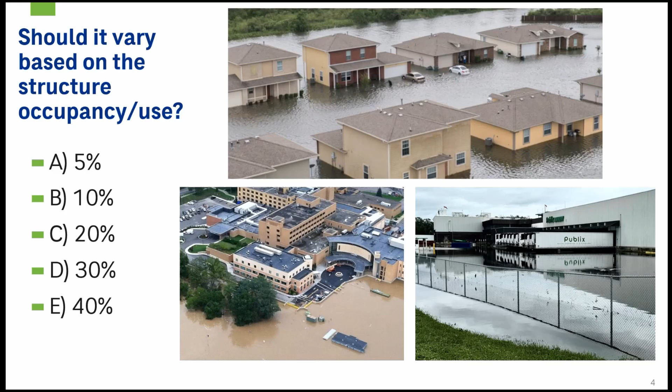We also poll the audience to gauge whether that requirement, or their risk tolerance, should be the same for all types of construction. Do you have the same opinion about a house versus, let's say, a supermarket or a warehouse, or for that matter, a hospital or other critical facility? For the most part, people answer yes, that they think there should be a different standard for something like a hospital versus maybe a single family house.

So those are two kinds of questions we talk through for a bit as a group, and then we wrap up with these being the recurrence intervals associated with those percent probabilities over a 50-year period. I mentioned earlier about me selecting option E, and I select that for the sake of discussion because that reflects what our current requirements are.

The 100-year annual chance, or what we currently use as the base flood, has a 40% probability of occurring over a 50-year period. For option D, as a rule of thumb, the National Fire Protection Association estimates there's about a 22 to 30% probability, with 30% being the higher end range, of having a house fire that requires a fire department to respond to your house over a 50-year period.

Option C, I typically refer to this as rolling the dice. Mother Nature has about a 1 in 6 chance, or about 16 to 17%, almost 20% chance of rolling a specific number. Option B, which is that 10% chance over that 50-year period, is about the equivalent of the risk for a magnitude 9 or greater earthquake or seismic event out in the Cascadia subduction zone, think Northern California to Vancouver.

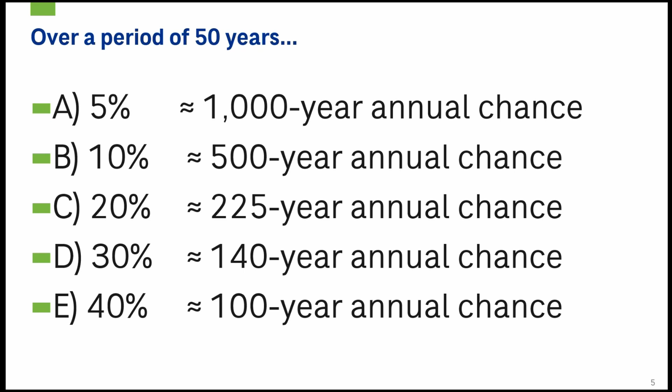This 5% chance, option A, is kind of like, if you ever played roulette, betting on two numbers. When you split your chip across two numbers, you have about a 5% chance of that number being hit. You'll see options A and B later in this presentation as ASCE 24, as Seal just mentioned, sets the 500-year and the 1,000-year as two of the different recurrence intervals it uses for the minimum elevation requirements based on the criticality of the building.

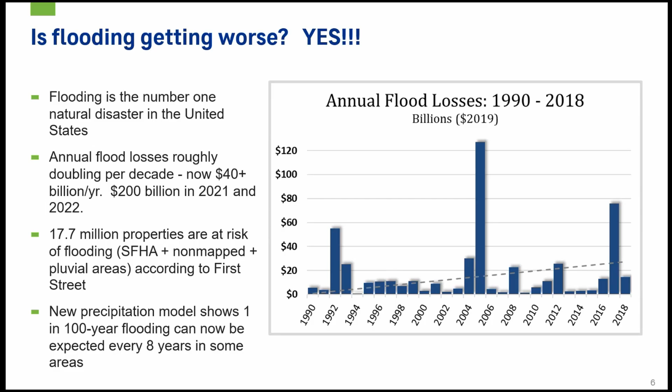These are some statistics the Association of State Floodplain Managers put together. The flood losses continue to increase. You can see here, Hurricane Katrina is clearly a blip in this chart. Harvey, Irma, and Maria in 2017 are also events that jump out at you. There's also some other major flooding events along the Mississippi, which you can see in the early 90s, and other events sprinkled throughout. But the bottom line on this slide is that flooding damages and trends seem to be getting worse.

I recently looked at the NFIP, or National Flood Insurance Program, claims from FEMA's open data. While flood insurance is mandatory within the floodplain, or special flood hazard area, and makes up most of the policies, about 25% of those claims actually come from outside the special flood hazard area, with the average claim being about the same both in and outside of it.

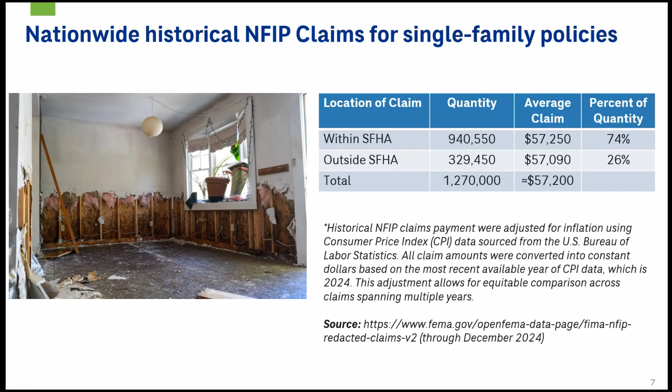One thing you'll notice, though, if you focus on newer construction, post-2000, is that the percentage of claims is slightly higher. So now it's about 30-70 versus 25-75, meaning 30% of those claims are occurring outside the special flood hazard area. And our claims are actually about 10% higher, almost $100,000 average, outside the special flood hazard area.

There's a lot of contributing factors to this. One question that always comes up is, why are they going up? In general, our houses are larger after 2000 than they were prior to 2000. So you have a larger house to be damaged, and we see higher claims in newer construction when they are impacted.

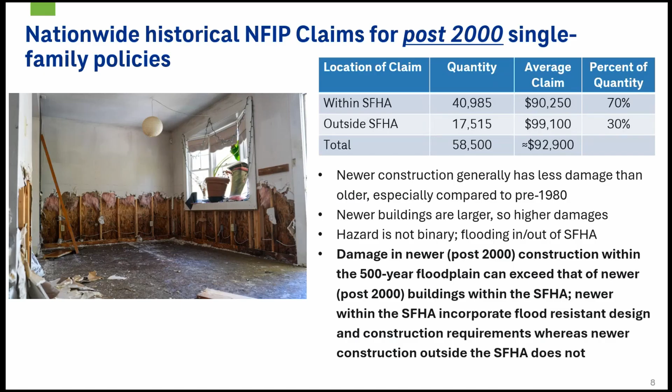But one reason, in my opinion, why you see claims outside the special flood hazard area having higher amounts is that newer construction within the floodplain is required to meet flood-resistant design and construction requirements under the CFR and NFIP regulations, whereas newer construction outside the special flood hazard area does not. So this binary approach is relatively ineffective, especially for this newer construction.

So enough on statistics, let's get into the topic of ASCE 24. It's a consensus standard that establishes the minimum requirements for flood-resistant design and construction of structures in the floodplain. Note the title indicates 'resistant' - it's not flood-proof, so there's still potential for damage and some level of residual risk. The other key thing to note is that the scope of the standard is for structures within flood hazard areas, so that flood hazard area has to be delineated for this standard to be applied or enforced.

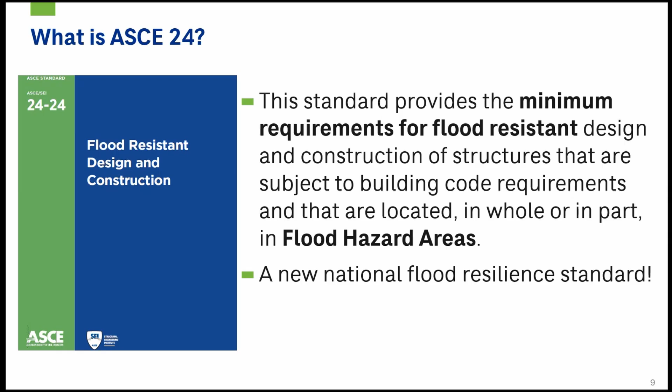A quick history on 24: the standard itself goes back to the mid-90s. I think it may have stemmed from some of those claims I showed you on those charts in the Midwest - we had damages up and down the Mississippi River. So in the mid-90s, funded by FEMA, the American Society of Civil Engineers produced a pre-standard document on flood-resistant design and construction.

The second edition was published in 2005, and the third edition, or the previous edition, is the one we have right now - published in 2014. So when you hear about 24-98, 24-05, 24-14, or now 24-24, that second number just has to do with the year in which it was published.

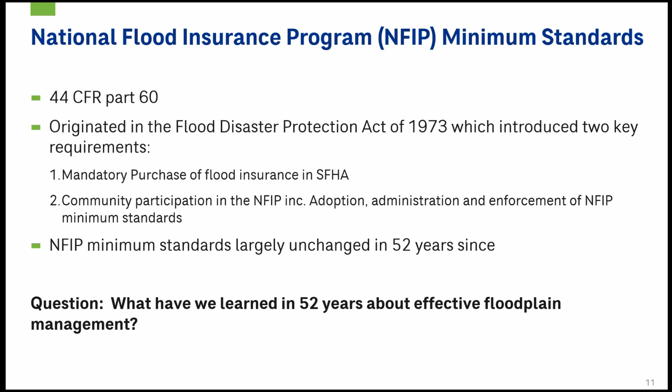As I mentioned earlier, most of that standard development, incorporating these into the building code, started in the mid-90s. So these requirements existed for about 20 years before formal, consistent adoption in the building code, predominantly relying on floodplain management ordinances at the state and local level to implement and enforce these requirements. Now, since the mid-90s to early 2000s, it's been supplemented by the building department having to make sure these are properly adopted and enforced as well.

The standard itself provides the minimum requirements for flood-resistant design and construction of structures required to meet building code requirements or subject to floodplain management regulations. Sometimes ASCE 24 isn't adopted at the state and local level by a building code; instead, it's adopted by a local floodplain management ordinance. The overall intent is to convey the NFIP requirements, so by following ASCE 24, you should be meeting or exceeding the requirements of the NFIP.

These requirements, similar to the triggers that exist under the National Flood Insurance Program, apply when within the flood hazard area, and they apply to new construction, or potentially something that's being substantially improved or that suffered substantial damage.

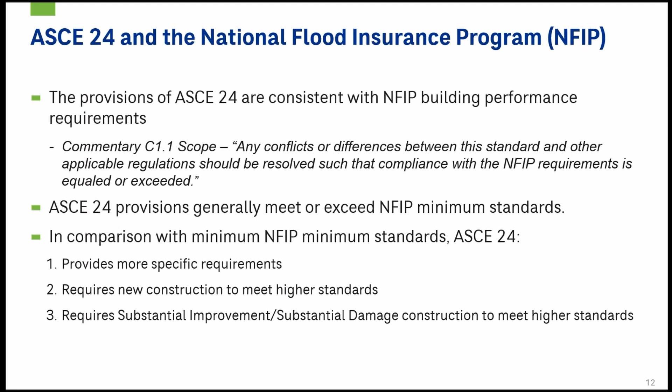Hopefully that gave you a good background on the standard for those of you that weren't familiar with it, and tried to draw some parallels between it and what's in the National Flood Insurance Program or what's in Part 60 of the Code of Federal Regulations.

Now I'm going to focus on some key changes that occurred or that are being introduced in the latest edition of the standard. Again, this is the 2024 edition compared to the 2014 edition.

The first piece is that we now have a risk-based approach to elevation. What does this mean? Traditionally, most floodplain management ordinances and even ASCE 24-14 handled something like freeboard by simply adding 1, 2, or 3 feet of elevation to the base flood elevation based on the criticality and potentially the location of the building.

For example, in ASCE 24-14, you may have more freeboard in a coastal V zone than you would throughout the rest of the floodplain, or you may have additional freeboard for a school versus a house. Keep in mind, not every floodplain is the same, so adding 1 or 2 feet does not necessarily provide you the same level of protection.

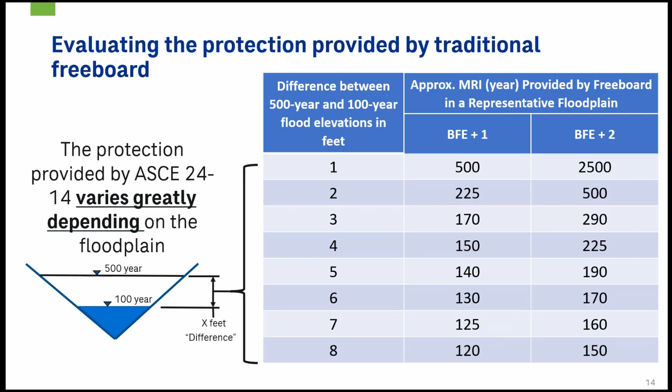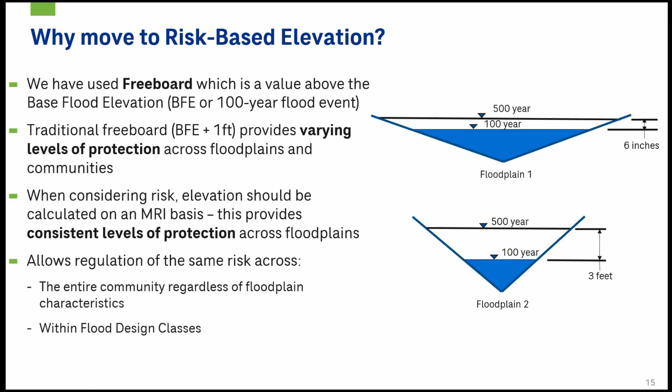That's one of the points of emphasis that the ASCE 24 committee had in moving to this approach. For example, with 1 foot of freeboard in a floodplain where there's only 1 foot of difference between the 100-year and 500-year levels, you're meeting that 500-year level of protection. The larger that difference becomes, the less flood risk reduction that 1 foot of freeboard actually provides. So we moved to a risk-based approach to elevation, and 24 moves to using a recurrence interval-based elevation, which allows for providing a consistent level of protection across all floodplains.

Keep in mind, this is based on the flood design class of the building. By flood design class, I mean what percent probability would you find acceptable or tolerate within your community for new construction over the next 50 years, and whether you'd have that same level of risk tolerance based on the criticality of that building. Most houses, single family construction, duplexes, and similar buildings will fall into this flood design class or risk category 2 building.

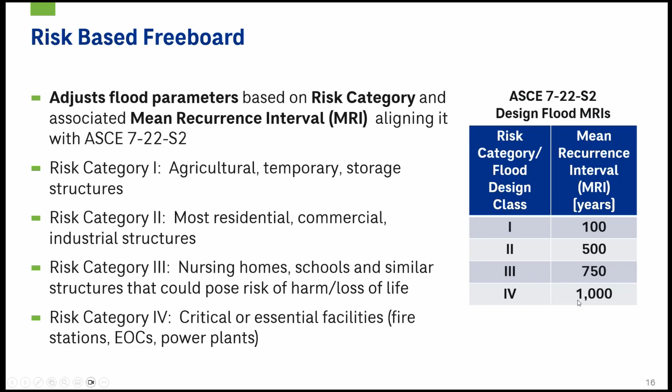So under ASCE 24, you're going to follow the 500-year mean recurrence interval as the basis for your design flood elevation. If you're building something like a nursing home or a school, that'll be a risk category or flood design class 3, required to be elevated to the 750-year level. And if you're building a critical or essential facility, such as an emergency operations center or a hospital, those will have to be designed to the 1,000-year recurrence interval.

Hopefully that gives you an overview of the elevations, the MRI-based or flood risk-based elevation requirements. To illustrate this further, I have a few slides showing how not every floodplain is the same. These are 3 different floodplains, pretty sure all in Ohio.

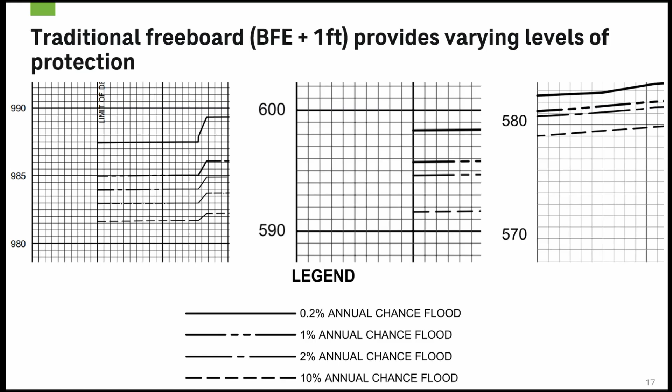We use this presentation for a lot of recent deliveries, and these are examples in Ohio. From left to right, you have about a 3-foot difference between the 100 and 500-year flood elevation, a 2-foot difference, and a 1-foot difference, across different watersheds and rivers throughout Ohio. The point is that 1-foot of freeboard doesn't always provide the same level of risk reduction. So we're going to the 500-year instead, at least for homes and risk category 2 buildings, which is the most common type of construction. And we're going even further for more critical facilities.

This slide is an example in the vicinity of Minneapolis, showing the profile along the Mississippi River. If we zoom in, you can see that even within this short distance along the river, you can have a difference of anywhere from 1 to 3 feet. The predominant difference in this area is about 2 to 3 feet. Again, this illustrates the difference between the 100 and 500 year, and makes sure anything new we're building is protected to at least the 500-year flood elevation.

Another key difference or attribute in 24-24 is the floodplain extent. I realize there's a lot of text on this slide, but these definitions are pulled directly from the standard, so I'm just highlighting 2 key points. The 2024 edition of ASCE 24 expands the flood hazard area to the 500-year floodplain, so the definition of the design flood in ASCE 24 was adjusted accordingly.

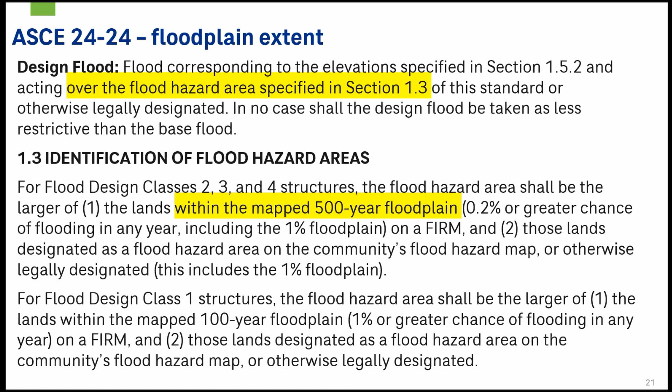Before, it used to just be the special flood hazard area or the base flood; now we're expanding to the 500 year, pointing to the definition in section 1.3. That definition specifically states it's within the mapped 500-year floodplain. Not every flood insurance rate map in the country has a shaded X zone or this 500-year floodplain delineated, so the committee wanted to make sure it had to be mapped—either on a flood insurance rate map, or a product like what Minnesota's DNR provides showing the 500-year flood hazard area, or whatever's adopted by the community. The key point is that it was mapped, and it's not on the developer or design professional to figure out whether an area is or isn't within a 500-year floodplain. So it has to be mapped in order to apply, if you're adopting the standard as written.

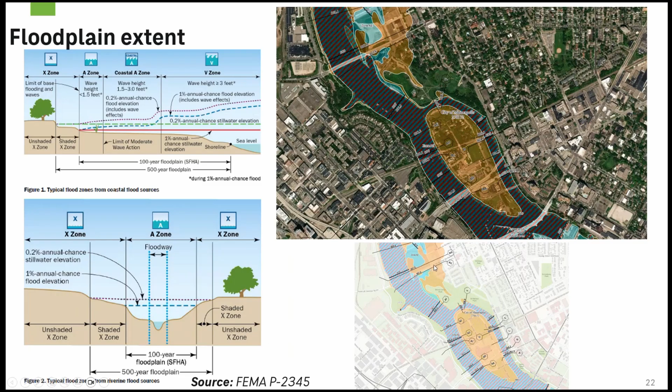So when following 24-24 and using a FIRM, if you're in the shaded X zone—like that island I showed earlier in Minneapolis—it would apply there. If I move further northwest of that island, traditionally our floodplain management ordinances, the Code of Federal Regulations, and the NFIP regulate construction within the A zone and the floodway. Now it would be expanded to the shaded X zone if applying ASCE 24. This was a map view; now here's a profile view. There aren't too many coastal or V zone floodplains, so I'll focus on this non-coastal example: you'll typically have your A zone with the floodway delineated within it, shown here on the map, and also a shaded X zone. So this standard is now expanding the flood hazard area to include the shaded X zone, or the 500-year floodplain.

So moving to a risk-based elevation, in my opinion, further exacerbates what we call the waterfall effect of the current NFIP. This is the binary approach—you're either in or out of the floodplain. This is the limit of the 100-year floodplain: you're in it, or you're out of it. We regulate you here, we don't regulate you out here.

But now with these additional elevation requirements, whether you're using freeboard, which is what we've used traditionally, or if you assume the difference between the BFE and the 500-year is 1, 2, or 3 feet, we have buildings built within the 100-year floodplain that are much higher, potentially much higher, than those built immediately outside of it. So we call this the waterfall effect, and this was also illustrated through those flood insurance claims I was showing you earlier.

In new construction, we're seeing that the claims out here are about 10% higher than in here for newer construction. And that's because these buildings being built here are being elevated, where buildings here aren't. So we're seeing higher damages out here in this 500-year floodplain.

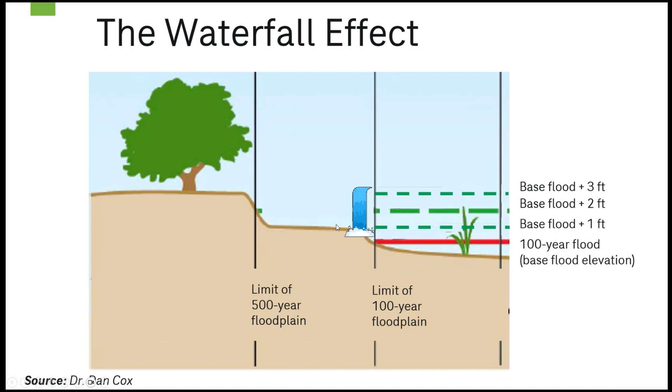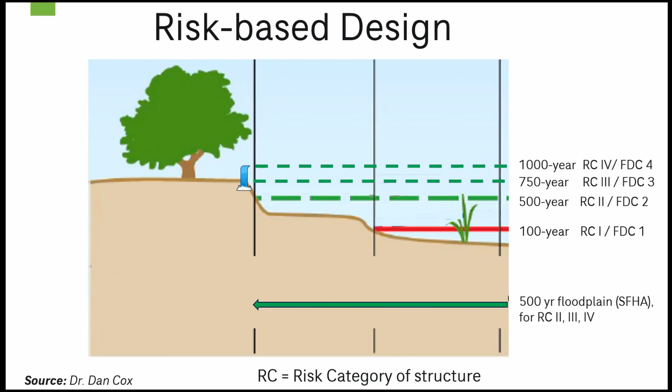So the goal behind this is, in essence, to expand the extent of the 500-year floodplain. The binary effect will still exist, but it should not be as hazardous by extending this out to the 500-year floodplain. Hopefully that gives you a basic overview of the risk-based approach, both from an elevation standpoint and from a flood extent or flood hazard map extent standpoint.

I'm now going to walk through a recent case study from Hurricane Helene in Tennessee to help illustrate this elevation and floodplain extent example.

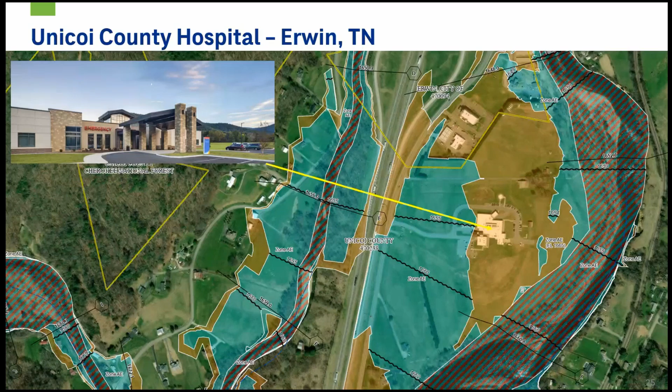This is a hospital built in Erwin, Tennessee, in Unicoi County. This hospital was opened in 2018, and based on news reports, it's about a $30 million facility, about 40,000 square feet. Unfortunately, during Hurricane Helene, this hospital experienced significant flooding, and over 50 people had to be rescued from the roof at this facility.

So we saw this example and were curious about it, and looked at how different things would have been had ASCE 24-24 been in place and incorporated here. This is an example of a floodplain that the decisions and changes being made in 24-24 are geared towards.

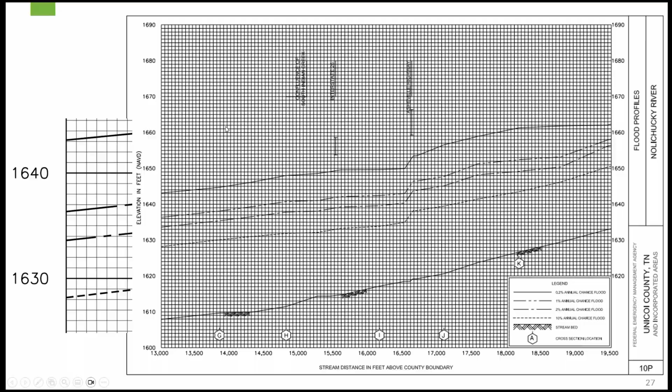This row here, Flood Design Class 2, refers to houses—residential buildings, things of that nature, probably your most common type of construction. 750 represents an additional level of criticality, like Flood Design Class 3, or buildings built to the 750-year recurrence interval—these are things like schools. And finally, Flood Design Class 4 covers your most critical facilities, such as hospitals, like the scenario we have here.

If that information is available—if you have the 500-year flood elevation—then you just apply Method A. If I have a house I'm building and I know the 500-year flood elevation, that's all I have to build to. We also know, and a lot of people on the committee realize, that most flood insurance studies across the country may or may not have this information, so there are other methods to help you estimate that elevation based on the information available to you.

So let's say I'm building a house and I don't have the 500-year, but I do have the 100-year and the 10-year based on the flood insurance study—then I can estimate it off of that. Same thing: most parts of the country don't have a 750-year or 1,000-year figure, so there are ways to estimate what that would be based on having the 500 and the 100, or the 100 and the 10-year. And even if you don't have any of that information, all you have is the 100-year, then you go back to a freeboard approach of 2.1, 2.6, and 3 feet, depending on the criticality of the building.

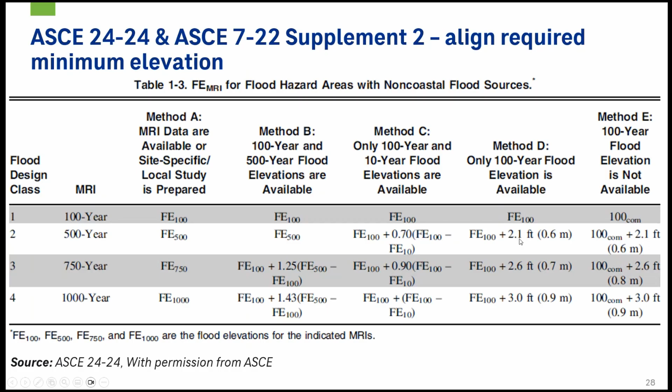The way these freeboard values were estimated was through an analysis done of the entire country, ultimately looking at the average of the 50th percentile of a population-weighted data set. They took building inventories across the country and characteristics of those floodplains, and came up with freeboard approaches for the different flood design classes of buildings. That's how you establish your elevations according to the new standard.

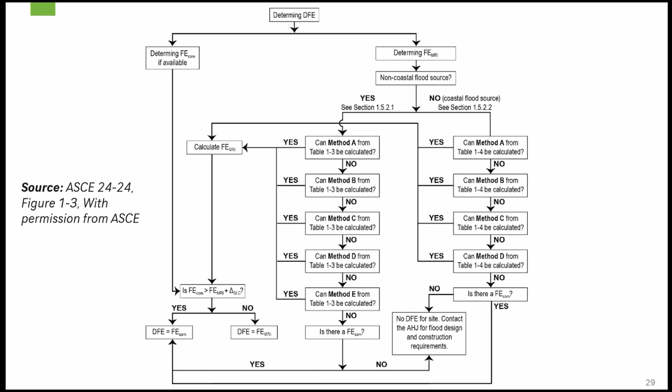There's also a flow chart in the document to reinforce the point that you don't have to go through every method on that previous table. If you have the information in front of you, if you have method A, if you have the 500, 750, or 1,000 established either on the floodplain map, or a community has done the study and established that for their entire community, then there's no reason to keep going through methods B, C, D, and E. All these different steps are trying to work with the best available information. If you have it, work with that. If you don't have sufficient information, then here's other ways to best estimate it.

We understand, or the committee understood, that there's probably a lot to handle on that chart, a lot of calculations that potentially have to be made. So the LSU Ag Center, Dr. Carol Friedland, I'm not sure if any of you are familiar with her, but she was on the committee. Her and some of the students there created this web-based tool that just allows you to enter in the information, and it tells you what your design flood elevation is.

So if you tell it what kind of building you're constructing, what kind of floodplain you're in, and what the base flood is, it'll estimate the design flood elevation for you. Based on this form here, the screenshot, we had a BFE of 7, and it's estimating that the minimum required elevation based on ASCE 24 is 9.1 feet. Again, this is likely because there was limited information available, data was not available, so it just applied our freeboard method.

But in this case here, I'm going to go back to the hospital, walk you through the tool a little bit further, and show you how you could use other information besides that freeboard method to estimate what the design flood elevation is. I'm assuming most of you are familiar with flood insurance studies, at least reading a profile, but what would the DFE be for the hospital under ASCE 24?

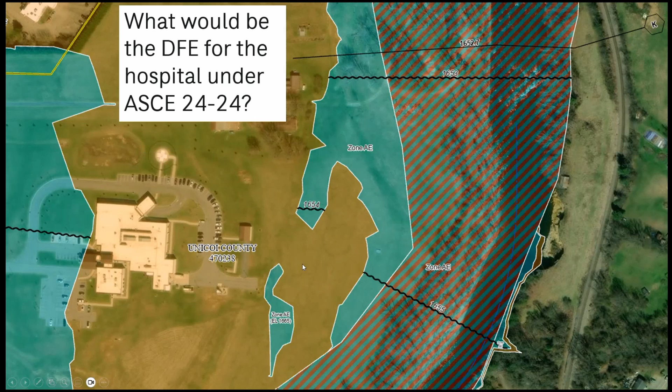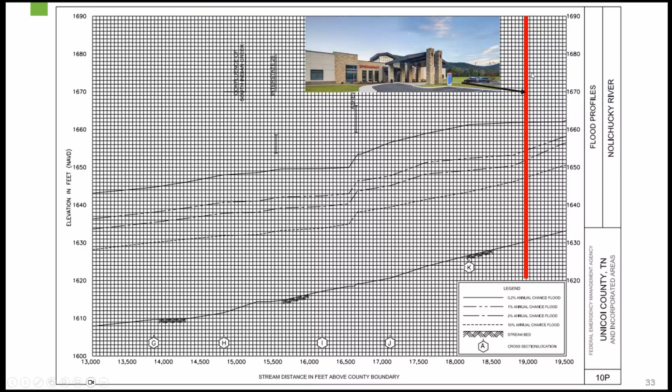Notice this is cross-section K right here, and the hospital is just a couple hundred feet upstream of cross-section K, and the BFE here is about 1655. So I'm going to go into that profile that I had up earlier on the screen. I showed you there was a 6-foot difference between the 100 and the 500 here, and I'm going to look specifically at the location of the hospital. Here's cross-section K, and I said I'm a couple hundred feet upstream of that. So here's a red line marking where the hospital is located.

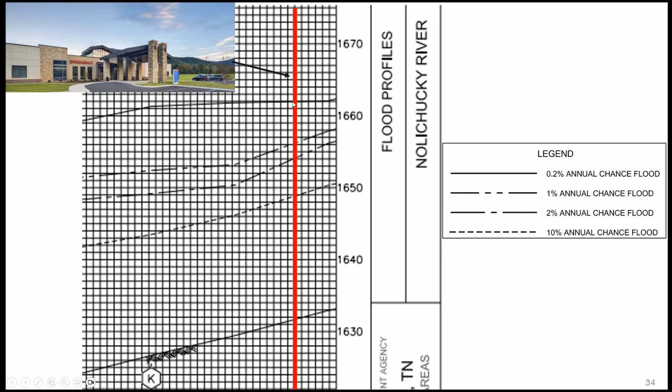I zoom in a little bit further on there. As you can see here, I have the 10, the 50, the 100, and the 500-year elevation available to me across the location of that hospital. If I read those elevations, here's that 1655 I mentioned earlier, which matches the BFE, and that's consistent with the 100-year. See that reading right there of 1655. I'm estimating the 500-year is about 1662, and that the 10-year is about 1648.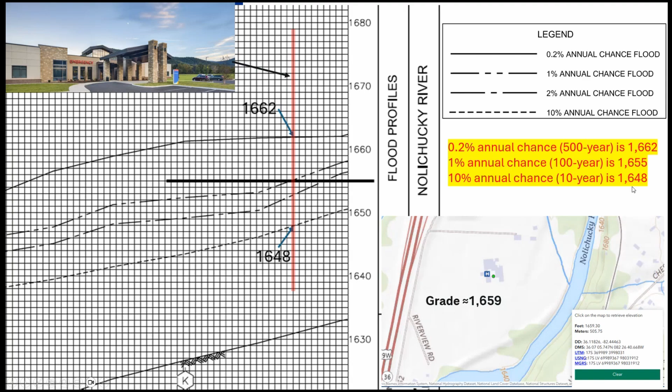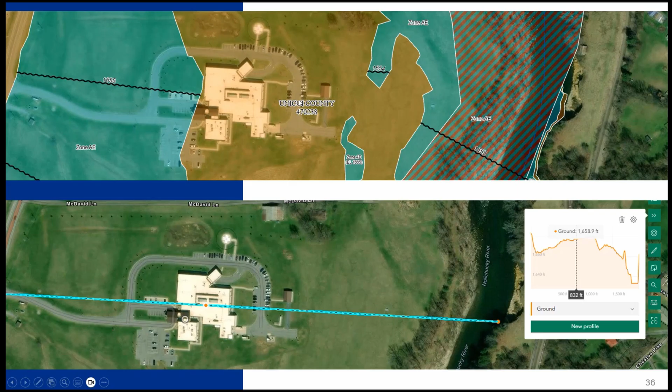Now I have most of the information that I need. Again, here's a profile view of that hospital. Here's the firm, the flood insurance rate map, and the USGS topo profile here at the bottom. Currently speaking, this hospital, if you follow most floodplain management ordinances or the CFR, is outside the floodplain, so it wouldn't be regulated. But under ASCE 24, because we've expanded the flood hazard area and the 500-year is delineated, this would fall under the requirements of ASCE 24. So it does apply to this.

Let's say we were building it new. Now what would our design flood elevation be? It's a risk category 4, it's in a riverine floodplain. We're telling the tool it's in a shaded X zone. We had read the BFE of 1655, both off the firm and off of the flood insurance study profile. And then we have an elevation, a 500-year flood elevation off of the profile, of 1662. So my design flood elevation for a risk category 4 building here, based on using this tool, and again I didn't have to do any of the math that was in that chart, would be 1665.

Again, this is an estimate based off of using the 500 and 100-year elevations. So 1665, and I told you earlier the elevation of that grade here was about 1659. So this building would have been built about 6 feet higher than it was at the time it was built in 2018, because there was no design flood elevation requirements when this was built, since it was outside the special flood hazard area.

Let's say the community wanted to build a school just west of the hospital. Under current requirements, we're now in the floodplain, so it would at least have to be built to the BFE of 1655. But let's see what would happen under ASCE 24. Very similar, but the main difference is I'm telling it it's a risk category 3 building, so now it's going to estimate what the 750-year elevation would be. Same inputs: 1655 for my BFE, 1662 for my 500, and my design flood elevation for a risk category 3 building would be 1663.8.

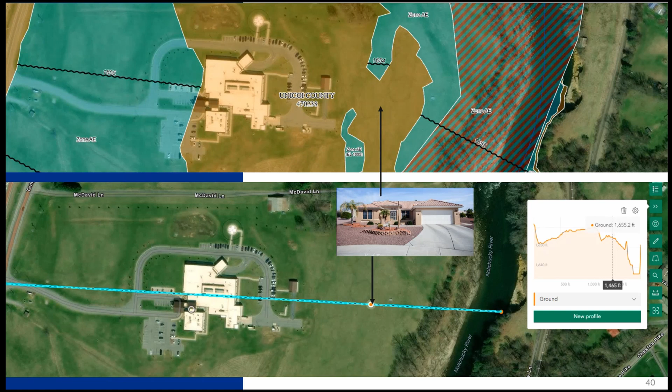And then finally, if the community wanted to build a house or a subdivision, a risk category 2 building, let's say to the east of the hospital, this is outside the special flood hazard area. Currently, most communities wouldn't regulate this construction, but under ASCE 24, if they adopted it, they would be required to figure out what the 500-year flood elevation is. In this case I wouldn't need the web tool; I know it's 1662, so no inputs to make, and that would establish the design flood elevation for a risk category 2 building.

Manny, I've got a question.

Sure. Seal and I have looked at ASCE 24 and looking at the different classes, and I know it's descriptive with examples of what each class type of structure would be. But I've also found there are some cases where I'm never quite sure, is it a 3 or is it a 4? Is it strictly just a best judgment call in those cases, I assume?

I think so. One of the gray areas for me is things like water treatment plants and utilities. It talks about if they service a hospital, that brings them up to a 4, but for the most part I think most critical and essential facilities fit into that 4 area. Things like schools, maybe most utilities and treatment plants fall into that 3. Your residential and a lot of commercial spaces like stores, as long as they don't have a high occupancy number, likely fit into risk category 2. We were looking at a municipal well and debating, is it a 3 or 4? We decided on a 3, but it sounds like if it's strictly serving something like a hospital, maybe it could be a 4.

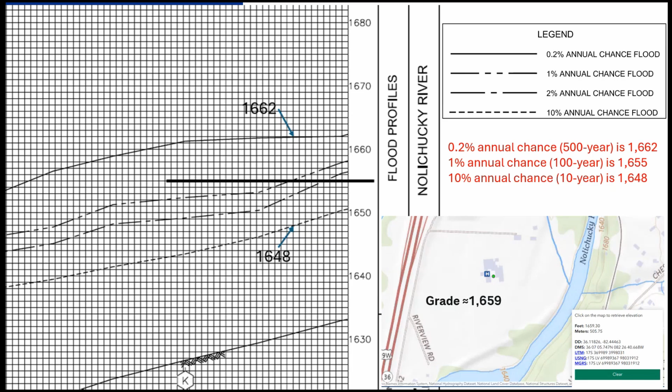Thank you. All right, I'm going to hop into the last topic now, with respect to the key changes in ASCE 24. Did you say ASCE 24 was already adopted by the International Building Code?

It has not. The International Code Council is in the process of updating to the 2027 edition of their code, so the IBC and IRC—I have a slide on it too at the end. They have not finished that process. There was one hearing in Orlando here in April, and there's another hearing coming up later this month.

That hearing in Cleveland will decide whether or not ASCE 24 is adopted into both the International Building Code and the International Residential Code for the 2027 edition. The 2024 edition of the IBC and IRC, or the I-codes, have adopted ASCE 24-14. I believe ASCE 24-14 has been in the I-codes since the 2018 edition—so 18, 21, and 24.

Before that, ASCE 24-05 was in the 2015, 2012, 2009, and 2006 editions of the building code. So I think since about the 2003 edition of the building codes, ASCE 24 has been incorporated—it's just a matter of which edition, 24-05 or 24-14, that's been adopted. Right now, 24-24 is to be determined.

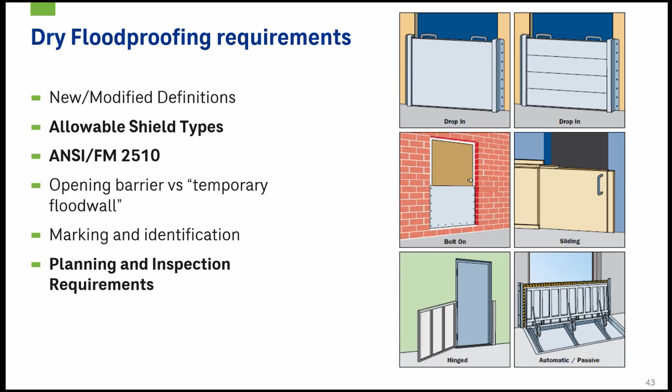With respect to shield types, think of these shields as measures needed to help finish closing off the building. In essence, dry flood proofing means keeping water from coming into the building, so you make the walls substantially impermeable. The walls keep the water out, but you still have to be able to get in and out of the building.

Normally that's typically a door. Sometimes folks construct stairwells that go up and down, but for the most part, most architects and engineers keep that door at the same level. The walls keep the water out, but they have to put a temporary opening barrier up to keep water from coming in through that door. These are called shields, defined as such in the standard, and there are new requirements for shields in Chapter 6 of ASCE 24-24.

Two things in particular: first, there are different requirements for new construction versus substantial improvement—two different sets of categories. This is relatively new to the standard; there was very little in ASCE 24-14 that differentiated between new and substantial improvement. New is something built for the first time, at least for this slide, while substantial improvement is more like a retrofit. So the committee outlined different requirements for something built for the first time versus something retrofitted.

The other difference you'll see with these shield requirements is whether they're contingent or permanent. Contingent means the logs are removable and stored somewhere. Permanent means that shield has to be there 24/7. So the more critical the building—you'll see here, risk category 4—the more permanent that measure needs to be. If you have a hospital with an exterior door you needed to protect, those measures would need to be permanent.

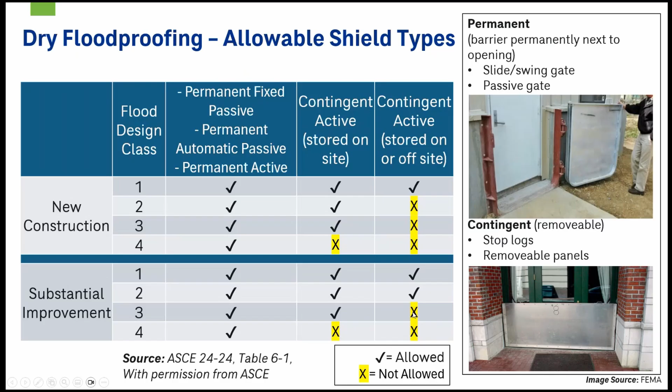To further allow for different levels of risk, there's also the question of whether contingent measures have to be stored on site or not. For new construction, the expectation is that those measures be stored on site. For retrofits, there is more leeway in terms of when measures can be stored on or off site. Another piece related to dry flood proofing is the testing requirements for these shields—in new construction, all shields must be tested.

So your design needs to incorporate those tested shields. Let's say there's a product out there that was tested to an opening that's 10 feet wide and 4 feet in height, keeping out 4 feet of water. For new construction, that's the limitation of the opening size. It can't be wider than 10 feet, and it cannot exceed more than 4 feet of water that it needs to keep out. You're limited to using products that have been tested to the standard.

For retrofits, there is leeway that allows a design professional to go beyond what was tested. The thought process was that for a lot of retrofits, you have a lot less control over the size of the opening. So potentially the design professional, architects, or engineers can work with the manufacturer to confirm whether the product will meet requirements. Let's say you have a 12-foot opening and need to keep 6 feet of water out, but that product was only tested to 10 by 4. Maybe they can evaluate with the manufacturer, or potentially do limited testing rather than the full testing required to meet 2510, to confirm that product can meet those requirements.

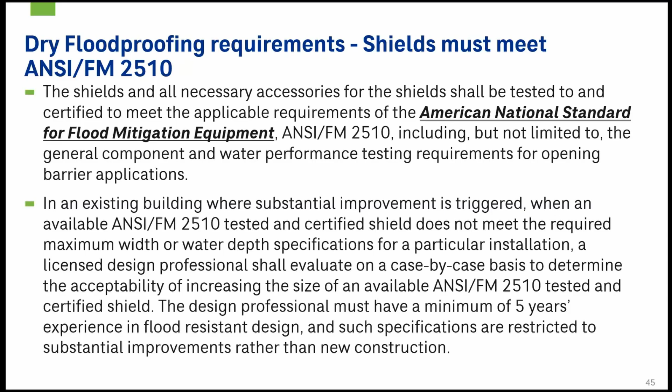So again, the same difference as the previous slide - you do have some allowance for differences between something built new for the first time versus something being retrofitted. And then finally, for planning and inspection requirements, there are changes related to plans at the time of construction.

They should outline routine inspections and deployment requirements within those plans. The plans need to meet certain implementation requirements, specifically timing - how much time it takes to implement these measures. So the more critical the building, the less time you have.

So let's say I'll use that hospital example. If you're dry flood proofing it, all those measures should be able to be implemented within 4 hours. Maybe for a flood design class 2, let's say a storefront building, those have 12 hours. A school would potentially have 8 hours as a flood design class 3.

And then a couple slides back, I showed you the emphasis on having permanent measures. The committee felt there was a possibility we're going to see a lot more use of passive measures. Passive measures, in essence, don't require any level of human intervention. One lesson learned with those products is that they've actually been deployed and the building owners didn't even realize it - say there was some rain or storm water, and that passive gate automatically popped up.

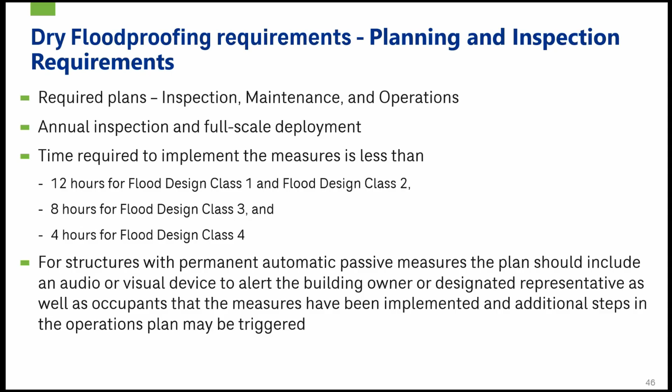Well, now you've impeded that point of egress. The committee wanted to make sure that was being conveyed in some way, shape, or form to the facility manager, that your passive measures have been deployed. So if you rely on passive measures, there has to be some method to alert the building facility owner that those measures were activated.

All right, so hopefully those 3 topics gave you an overview of what's going on in ASCE 24. There are several other changes in the standard. One has simply to do with flood loads, and a lot of the changes you see in the 2024 edition are due to new requirements for estimating flood loads in ASCE 7. Again, this elevation requirement and floodplain extent requirement align with many of the changes that occurred in ASCE 7-22 Supplement 2.

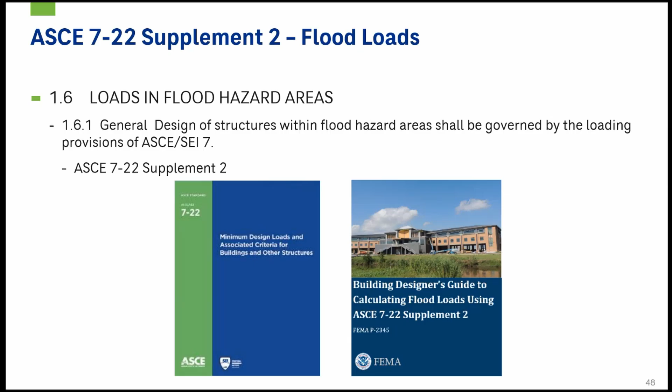If you're not familiar with those changes, I encourage you to take a look at FEMA publication - pretty easy number to remember, 2345. It outlines the requirements that are out there for flood loads now.

This slide here, really, I could spend another hour or two covering all the different changes that were highlighted. To give you context, from ASCE 24-05, from 2005 to 2014, I think there were about a dozen changes highlighted in the preface of ASCE 24. In ASCE 24-2024, there were 29 items highlighted in the preface from 14 to 24. So I tried to focus on probably the 3 key ones, especially elevation and floodplain extent. To me, that's by far the most drastic change here, especially for communities that reference this or are looking to exceed the NFIP.

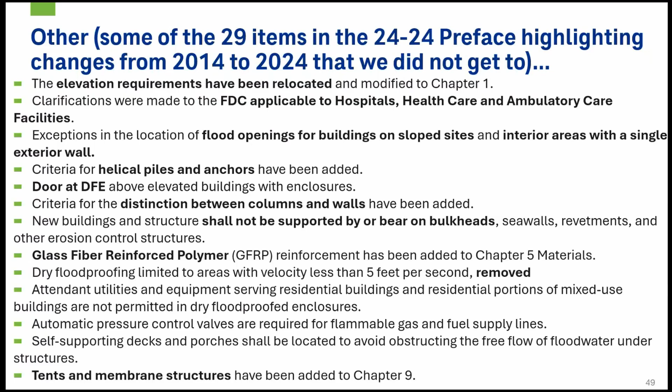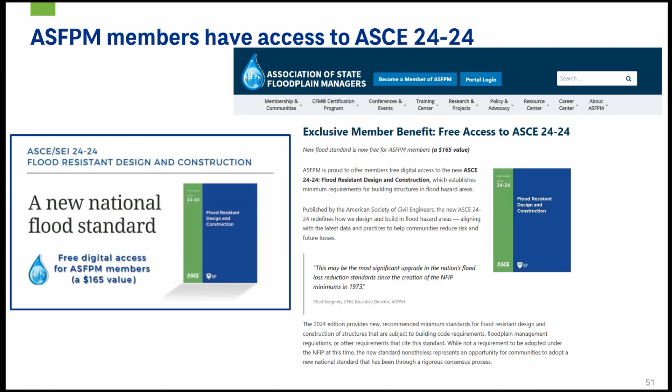But there's other topics here as well. The ASCE 24 standard, you can get to it online. If you log in with your ASFPM membership, you can view the standard. If not, your community may have a license to get access, or you may have to purchase it from ASCE, the American Society of Civil Engineers.

Also, the Association of State Floodplain Managers has a model ordinance that they've put out there. If you're interested, that's available online. You can search for it in the library, or go to members and communities, there's the non-structural floodproofing committee. I believe that's where ASFPM has made this model ordinance information available for now. They also have a PDF of a webinar delivered on ASCE 24, similar to this one, probably a bit longer, but that information is available out there. Both the standard and this model ordinance are available on the ASFPM website.

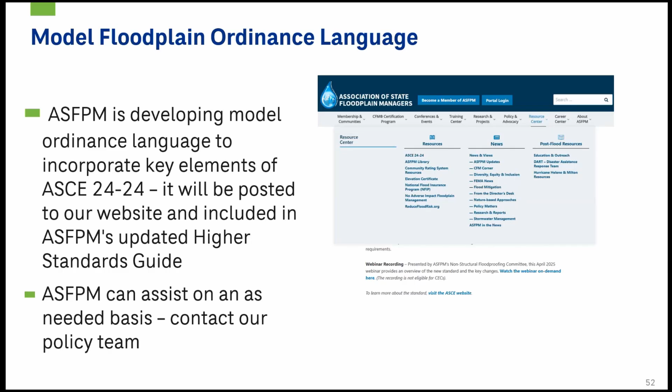And with that, I'll kind of wrap up here with my point of emphasis, which is mostly to spread the word about the new requirements in ASCE 24, and really just try to make sure we're not continuing to build in a way that contributes to tomorrow's problems. So I'd emphasize to folks to look at your practices and consider the design and construction practices in your community, and basically see if we can build this right the first time, hopefully not continuing to contribute to those flood losses we're seeing in the future.

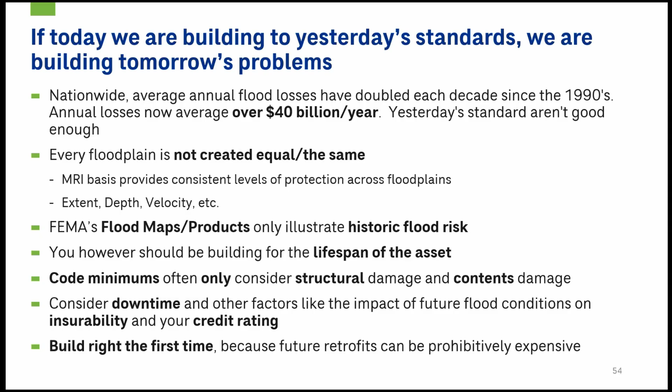With that, I'll open it up to any final questions there may be, and turn it back over to Seal and Gary.

One thing I did want to bring up was we had shared with Manny that our state floodproofing rules, for folks in Minnesota that's Minnesota Rules 1335, still refer to the 1972 Corps of Engineers floodproofing regulations, which are of course ancient. We were going through the process of getting the rules updated a few years ago. I reached out to my contact who works with the building code area at the Department of Labor and Industry, and he said that Minnesota Rules 1335 work got derailed by our statutorily mandated building code adoption cycle. We're just finishing up that work and will soon be getting back to the Minnesota Rules 1335 update.

In the draft rules we had earlier, we were looking at adopting ASCE 24-14. My contact was asking whether we're going to want to get our technical advisory group back together and have a look at 24-24. I'm going to let them know that yes, I think we should be getting our technical advisory group together and at least having a discussion about that. At a minimum, hopefully we'll get it updated to 24-14 and back on track, since there are a lot of steps in the rule making process. We did go through that a couple of years ago.